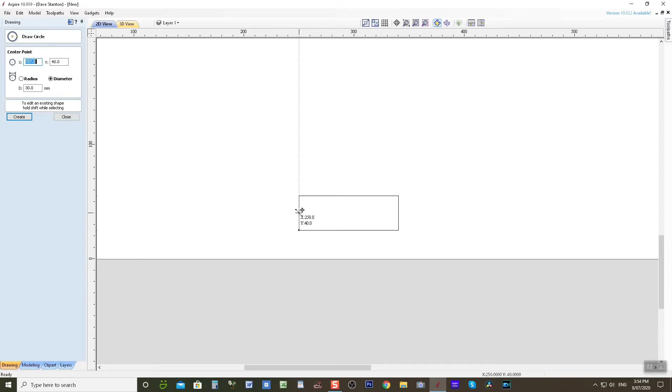And by all means, let's do it over there as well. We'll slide across to the other rectangle and put the circle there, and the circle there. Now we'll say close - we're finished with all that.

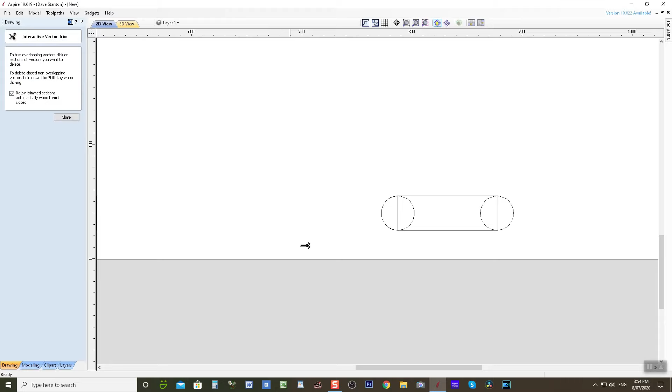We're going to put all the vectors to sleep by just left clicking on the screen. Now I'm going to get the scissors and say goodbye to some of these lines that we don't want. You'll notice now if I close the scissors and click one part of this vector, the whole thing has been welded together - that is one full vector, a new vector made from many.

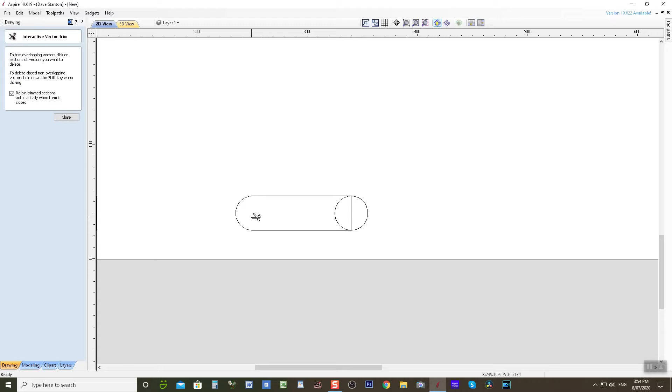There we go, that's what it used to look like. Get the scissors again, and we can click, click, click, click, and we'll just check that it's also working as a full vector. All of it's woken up.

All right, next thing to do is go from the drawing - this is computer-aided design or computer-aided drawing - over to the other side here. We'll throw up that menu, and this is computer-aided machining, or CAM. The other one was CAD, you'll know it. This one is CAM. Let's wake up the pair of vectors by left-clicking on the screen - hello, there they are.

I'm going to select a toolpath operation, and this particular one will be the profile toolpath that lets me cut on, inside, or outside a vector. I've already set this up to go 18.2 millimeters, which is 0.2 of a millimeter through the back of the board. I do want these to be totally released at the end. We're going to go through in 4 passes, and we have a 1/4 inch end mill selected.

I'll go to select and show you the details of that. It will be spinning at 18,000 RPM, traveling at 6 meters a minute. Its plunge rate will be 300 millimeters a minute, so it will go down 1 foot in a minute's time. There's the end mill - everything's set there. That's fine.

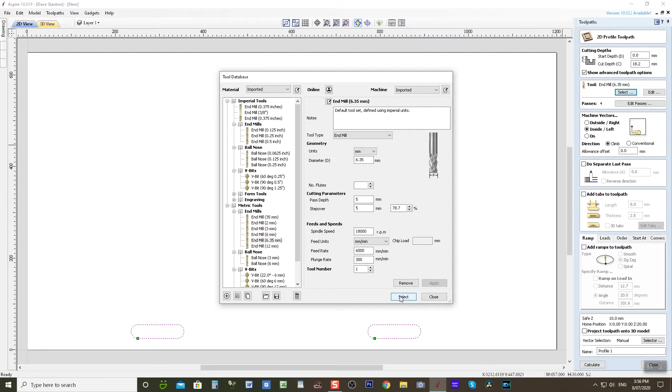All good, okay so we just say select. Now, I want it to go on the inside of the vector. So if we make this a little bit bigger so we can see what's happening here, drag it back over this way.

I want the cutter working on the inside of the vector, and I also want it to do what's called a climb cut, or should I do a conventional? If I'm going on the inside and it's turning this direction, it's going to want to chip everything out. If it's going counterclockwise, it's coming down into the material, and this part here has already been cut, so it's fine, it's not going to be chipping out. So this will give me a cleaner cut if I do this, what's called climb.

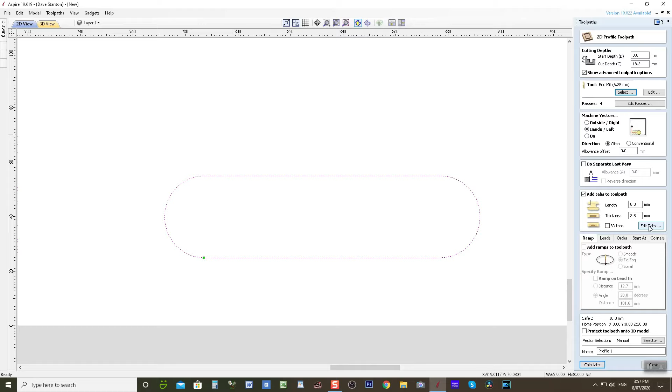Now I need to add some tabs to the toolpaths, and I want them to be 2.5 millimeters deep. The tabs are basically the things I leave in the bottom, so the center part that isn't cut doesn't go flying around the room like a missile. So they're going to be 8 millimeters long, 2.5 millimeters thick, and of course they'll be at the bottom. I can just place these tabs where I want to.

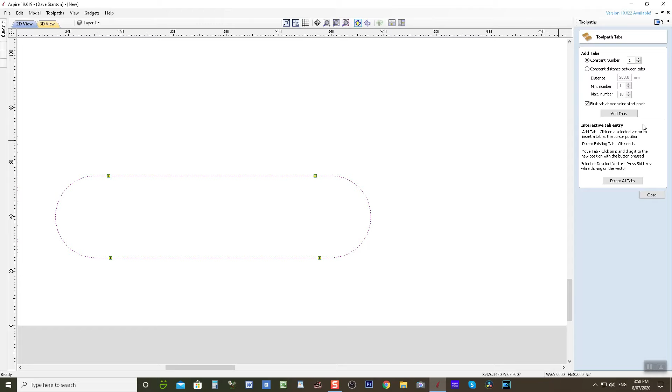I'm going to put one there, and one there, and I'm going to put 4 in. It's only small, but I will do it. And across to the other one, put 1, 2, 3, 4. I don't like putting them in a curve because they're harder to clean up. Yeah, pretty simple, all right, close that.

So we have all this sorted out. I'll make it smaller by pulling back on the scroll wheel so you can see what's going on, and again, a little bit more.

Lovely. Do I want to add any ramps to the toolpath? Seeing I'm using a quarter inch end mill, which is basically a spiral up cutter, I don't think I need to do any ramping, they can cut down pretty well straight on their own. If I was using a straight 2-flute router cutter, then I would ramp, because the cutters don't completely traverse across the bottom. They're on either side, and there's a bit of dumb metal in the middle, put it bluntly.

We'll leave it as this name here. Down here you'll also see it says safe Z is 10 millimeters, which means the Z axis, basically where the spindle or router is traveling up and down, when it's finished a cut it will come up clear before it moves to the next vector to work on it. We don't want it to go down 18.2 millimeters and then just go to the other side, that'd be terrible, and I'd smash things.

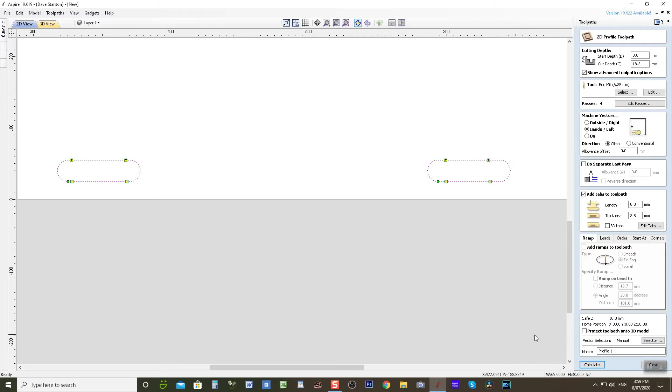All right, so now we're going to say calculate all of that, which it's done, and it said we're going to go through the job, and I'm saying that's Jim Dandy. Here we go. Now you can see down here it's going to be starting over here, travel up 10 millimeters above the job, do this one first in 4 passes, then come up out of that 10 millimeters above, and then do this one over here.

And we can do a preview. I'm going to slow the preview down so you can see how it happens, and do a kind of animation of what it's going to do. Here we go, 1 and 2. So that's all cut, and then we're going to close.

And I'm going to find out how long that job would have taken just by clicking on that. And it tells me 1 minute and 20 seconds, which is fine. Close that, and then now I'm going to save the toolpath.

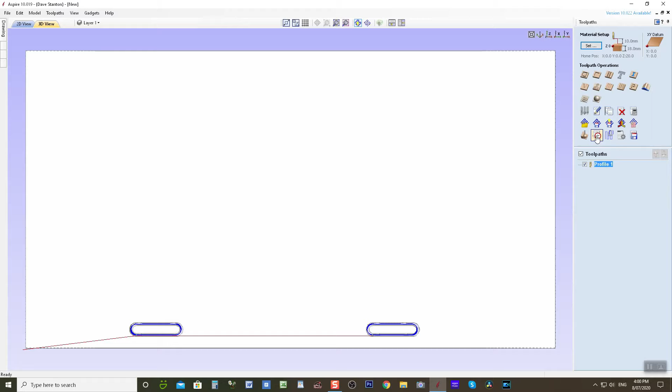Well, before I save the toolpath, let's flip her over and have a look. So what I'm going to do is drag it back to make it a bit smaller, this is on the scroll wheel, drag it back towards me. Now I'm going to push down on the left-hand mouse button and push away from me, and it's rolling it over so I can see underneath.

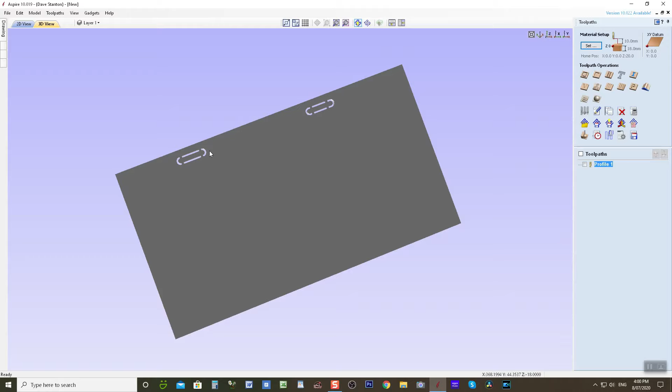And that's lovely. If I click on this, that gets rid of the actual toolpath showing, so we can see it's cut out there. There's all the 4 tabs holding each one in, so I don't have any rockets flying around the workshop with me.

And now I can click on this button up here, which says Z, and it's going to flip the thing back to looking from above. And now I'm going to click on this and save that as an Avid CNC post-processor, and click save the toolpath. I'll save it to my stick and we'll be done.